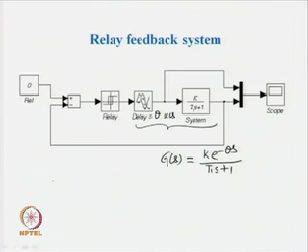found that the output of the system is governed by two expressions, namely y(t) = kh(1 - e^(-t/T1)) for the time range 0 ≤ t ≤ θ, and y(t) = kh(2e^(-(t-θ)/T1) - e^(-t/T1) - 1) for the time range θ to Pu/2.

So, these two equations y(t) can be plotted, and in that case the output will take the shape of this form, where this is the time Pu/2, the peak occurs at time t equal to θ, and the plot begins with time t equal to 0.

Then we have also derived analytical expressions which are explicitly meant for stable first order plus dead time systems, and those analytical expressions are of these forms. So, the condition for sustained oscillatory output is given by the expression 2e^(-(Pu/2 - θ)/T1) - e^(-Pu/(2T1)) - 1 = 0.

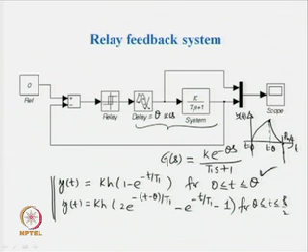It is not an assumption; as far as first order plus dead time systems and their relay tests are concerned, the peak occurs at time t equal to θ, because the analytical expressions have given that we can have a plot for y(t) up to time t equal to θ, after which the values go on decreasing, because the input to the system changes from positive h to minus h. Because of the change in input, the output slides down and comes down to 0 at time t equal to Pu/2.

Now, these two expressions can be used further for identifying a simple transfer function model. What do we mean by simple transfer function model? Let us consider initially the identification of an integrator with delay. So, the identification of a system given by the transfer function G(s) = k̄ e^(-θs) / s.

So, when the system is of this form, what sort of output is expected from the system? Under relay test, we know that for such a system the output will be triangular pulses only. We will concentrate on only the positive half of the output for developing analytical expressions. So, let this be y(t) for time t from 0 to Pu/2.

Where the peak occurs I do not know, but we shall make use of these expressions to find explicit expressions for the parameters of this transfer function model. How many parameters are there in this transfer function model? We have got two unknowns in this transfer function model.

Now, let me make use of these expressions. So, we have got the first expression as 2 e^(-(Pu/2 - theta)/T1) - e^(-Pu/(2T1)) - 1 = 0. So, when T1 tends to infinity, what do we get? The exponential term e^(-(Pu/2 - theta)/T1) can be written in the form of 1 - (Pu/2 - theta)/T1.

Why is that so? Because when T1 tends to infinity, the exponent will be a small number, and e^x, when x is a small number, becomes 1 + x, and e^(-x) becomes 1 - x when x tends to 0. So, when T1 tends to infinity, the whole exponent will be small, enabling us to write the exponential term as 1 - (Pu/2 - theta)/T1. Similarly, e^(-Pu/(2T1)) when T1 is very large can be written as 1 - Pu/(2T1).

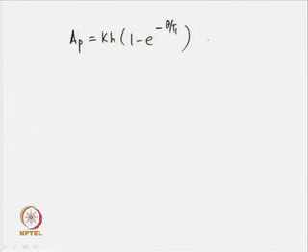This is one explicit expression we have been able to obtain using the analysis and using the measurement Pu, or Pu by 2, half period of the oscillation. Let us use the second expression. Now, we also know that the peak amplitude of the output signal Ap is obtained with the expression Ap is equal to kh(1 minus e to the power minus theta upon T1). This is what we get for the first order plus dead time stable system.

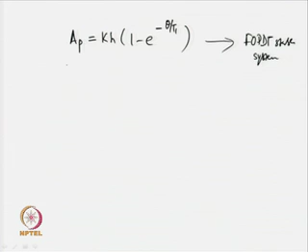Now, when the limiting value is put here also, when T1 tends to infinity, then Ap will be equal to kh(1 minus e to the power minus 0). No, we cannot put that, sorry, again I have to make use of the condition that when T1 tends to infinity, the term e to the power minus theta upon T1 will be given by 1 minus theta upon T1, the way we obtained earlier using the condition that e to the power x is equal to 1 plus x and e to the power minus x is equal to 1 minus x when x tends to 0.

So, when T1 tends to infinity, e to the power minus theta upon T1 is 1 minus theta upon T1, thereby giving us Ap is equal to kh times (1 minus (1 minus theta by T1)), which is ultimately kh times theta by T1. Again, we know that k by T1 is k bar. So, this gives us k bar h theta, since k by T1 is finite and given by k bar. Thus this enables us to write an expression of the form k bar is equal to Ap by h theta. So, this is equation number 2 for us.

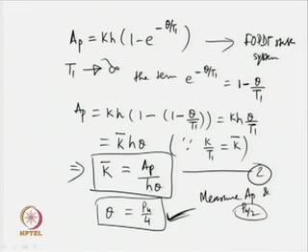After estimating theta, use equation 2, which is k bar is equal to Ap by h theta. h is known, a user-defined or user-set value. Now, theta is estimated and Ap is measured, which enables us to estimate the unknown k bar. So, let me summarize these two things.

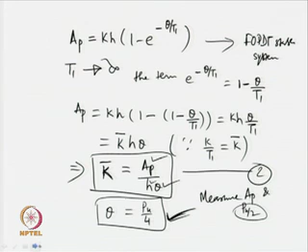Using these two expressions, conditions for sustained oscillatory output obtained for a first order plus dead time stable system, it is possible to find the expressions theta is equal to Pu by 4 and k bar is equal to Ap by h theta, which can be used to estimate the unknown parameters k bar and theta of our transfer function model G(s) is equal to k bar e to the power minus theta s upon s. So, if we have an integral system with dead time, then it is possible to measure Ap and Pu, or Ap and Pu by 2, make use of these explicit expressions and estimate the unknowns of this transfer function model.

Then the question may come, how can we apply this technique for estimating the transfer function model? We have to observe the output signal. The output signal from the relay test must be of triangular form, only then are we allowed to use these two expressions to find the transfer function model for the dynamics of the system. So, if the actual system is expected to have dynamics of this form, the measurements can be translated into the transfer function model parameters using these two expressions. Again, we shall extend this concept for identifying some other type of simple transfer function model that we have considered in our earlier lecture.

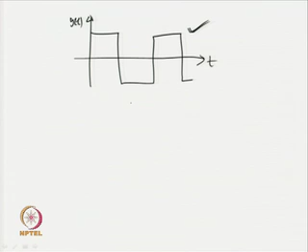Let the relay test result in output of the form shown over here. So, when the output of a relay test is of this form, then what sort of transfer function do we have to find for the dynamics of that system? The transfer function can be of the form G(s) = k e^(-θs). This we know, because when a relay test is conducted on a system having this dynamics, rectangular or square pulses are obtained as the output of the system.

Now, from here what is the half period again? Then Pu/2 is this much, and what is Ap? Ap is the output we obtain here. So, this is Ap and this is Pu/2. This is how we can make measurements on the output of the relay test, and the output will give us parameters like Ap and Pu/2.

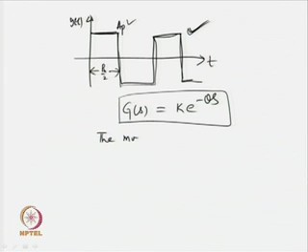So, assuming that the relay test is inducing output of this form, we shall go for identification of the dynamics of the system in the form G(s) = k e^(-θs). The model has got two unknowns, k and θ. Therefore, we need to find two expressions for k and θ in terms of the measurements Ap, Pu/2 and h, the relay output or the input to the system.

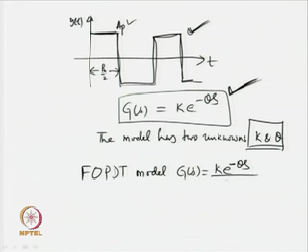Then how can we obtain such a model? We can obtain such a transfer function model from the general first order plus dead time model given by G(s) = k e^(-θs)/(T1 s + 1). Why do I target this particular first order plus dead time model? Because we have derived analytical expressions for it, and those expressions can be used to obtain analytical expressions for simpler models of this form, provided it is possible to get this model from the general one. So, how can we obtain it?

When T1 tends to 0, the first order plus dead time transfer function model will be G(s) = k e^(-θs). Then this limiting value can be put in the expressions obtained for the first order plus dead time model, and that will enable us to derive simpler, explicit expressions to find the unknowns of G(s) = k e^(-θs). So, we shall make use of those expressions now with the limiting condition that T1 tends to 0. One has to be very careful when applying limiting conditions to analytical expressions. You must follow some logic.

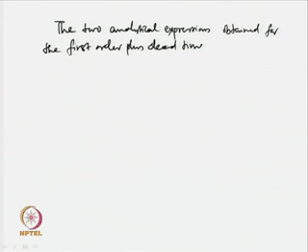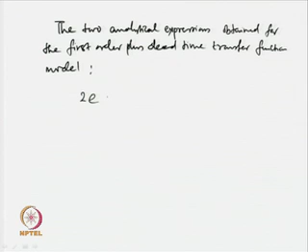So, it has been illustrated how powerful the two expressions are. The two analytical expressions we have obtained for the first order plus dead time transfer function model are 2 e to the power minus (pu by 2 minus theta) by T1 minus e to the power minus pu by 2 T1 minus 1 is equal to 0, and Ap equal to k h (1 minus e to the power minus theta by T1).

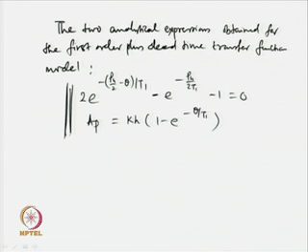These two can easily be extended for finding transfer function models of the form G(s) is equal to k e to the power minus theta s, or of the form G(s) is equal to k bar e to the power minus theta s upon s, with the limiting values of, in this case, T1 tends to 0, and in this case T1 tends to infinity, and k bar, equal to k upon T1, is finite.

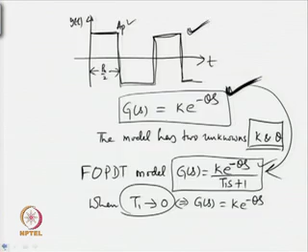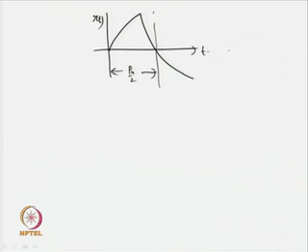So, basically by mentioning that, what I wish to point out is that these two expressions are quite powerful as far as analysis of first order plus dead time systems is concerned. So, first order plus dead time systems result in output of some specified form. The output we get is of this form. So, let us concentrate on the half period. This is the half period Pu by 2, this is my y(t) and this is t. So, this is what you get from a first order plus dead time system.

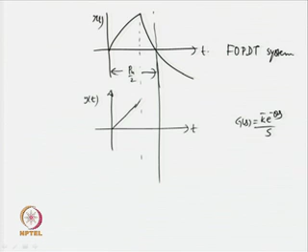Now, when we have got a simpler system whose dynamics is given by the transfer function G(s) = K bar e to the power minus theta s upon s, then the corresponding output becomes triangular in fashion, and when the system has got dynamics K e to the power minus theta s, the corresponding output from the system assumes a pulse of this form. So, looking at the shape of the output signal, we can decide about the type of transfer function model we should choose for obtaining the dynamics of the real time system.

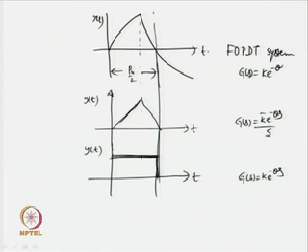So, in this case it is K e to the power minus theta s upon T1 s plus 1. So, assuming that we have got a stable first order plus dead time system, an output of this form is expected. Then, when we have got a simpler system which has got an integrator with delay, the output will be having this shape. When we have got a system with a gain and a delay only, then the output will be of this form. So, the point of mentioning all these things is that we can easily measure the peak amplitude Ap in all cases, and we can easily measure the half periods Pu by 2, employing zero crossing detectors and peak detectors.

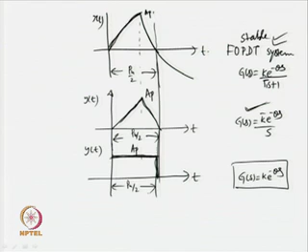To find the peak amplitudes, employ peak detectors, and for finding the half periods you employ a zero crossing detector. Measure Ap and Pu by 2, and use the analytical expressions we have found. So, for the stable first order plus dead time system, what are the analytical expressions? The first two. Use the first two analytical expressions and solve the two expressions simultaneously to obtain the unknowns associated with the transfer function model.

Whereas, when the output of the system is of this rectangular form, then use the expressions K = Ap by h and theta = Pu by 2. But in this case we have got K bar: K bar = Ap by h theta and theta = Pu by 4. So, the whole point of discussion about these wave shapes is: look at the shape of the output signal, then go for a particular type of transfer function model for describing the dynamics of the real time system.

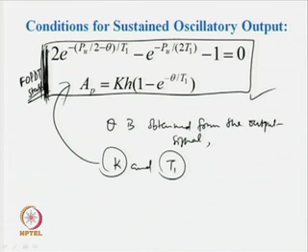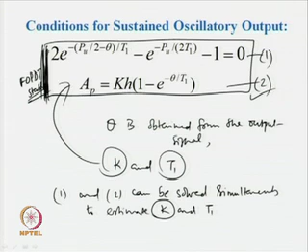So, equations 1 and 2 can be solved simultaneously to estimate k and t1. In that case, k need not be known a priori; k can be estimated as well, k can be obtained using the analytical expressions.

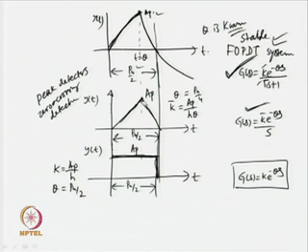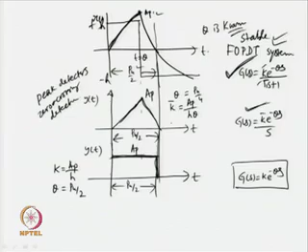Now, there is one more technique to find the time delay theta associated with the transfer function models. One can take the first order derivative of the output signal. In that case, there will be a sharp change in the first order derivative of the output signal at time t equal to theta. Why does that happen? We know that the input to the system is changing at time t equal to theta. The input becomes minus h at time t equal to theta, but prior to that the input remains positive h. So, that concept can be made use of to find the time delay associated with transfer function models.

So, what I mean by that: given a first order plus dead time system, when a relay test is conducted, it is expected to obtain the output y(t) in this form. Now, if I wish to find y dot t, what will happen? There will be sharp changes in y dot t at time t equal to theta. Why is that so? Because the output signal we have is not continuous.

As far as the half period Pu by 2 is concerned, we have got the outputs from different inputs; the inputs are changing. Therefore, we have two segments, or indirectly speaking, I cannot have the plot for the whole half period using one analytical expression. So, I have two expressions. For this part of the output signal, I use y(t) equal to something for time 0 to theta. Similarly, for the other part of the output, I use another expression for y(t) for the time range from t equal to theta to t equal to Pu by 2.

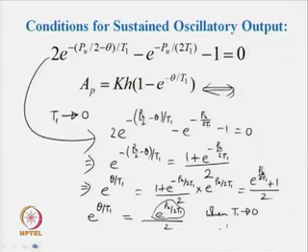I will summarize now. So, what we have studied in our lecture: identification for simple systems is discussed. We have obtained analytical expressions, rather I would say explicit expressions, for the parameters of simple transfer function models like a transfer function with an integrator and delay, and other simple transfer functions like a gain with a delay. So, we have been able to derive explicit expressions for the unknowns of those simple transfer functions in terms of measurements made on the output waveform.

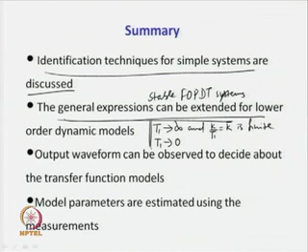Now, the general expressions found for the stable first order plus dead time systems have been extended for lower order dynamic models. How has that been possible? With the limiting condition that T1 tends to infinity such that k upon T1 is equal to k bar is finite, and the other limiting condition T1 tends to 0. Using these two limiting conditions in the general expressions, we have been able to find simpler explicit expressions for the transfer function models of simpler systems.

Now, the output waveform can be observed to decide about the transfer function models. When the output of the relay test is of this exponential shape, we go for a transfer function model of the form G(s) = k e^(-θs) / (T1 s + 1). When the relay test is yielding triangular pulses only, the transfer function model can be of the form k bar e^(-θs) / s, whereas when the output is either rectangular or square pulses only, the transfer function model can be of the form G(s) = k e^(-θs).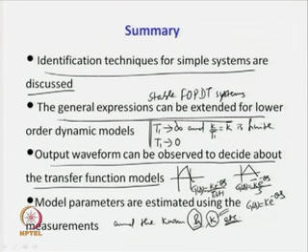Now, the model parameters are estimated using the measurements and the knowns h and k, etc. Why are these known? Because these are user defined; users set the relay parameters. And in the first order plus dead time transfer function model case, if a priori information about the steady state gain is there, then that information also can be used in the explicit or analytical expressions to find the unknowns of transfer function models.

Now, some points to ponder: how to decide the form of transfer function models of systems to be identified. As I have already mentioned, when the output of the relay test is of this form, go for the transfer function model G(s) = k e^(-θs) / (T1 s + 1), and assume that one unknown of this model is known a priori, then estimate the remaining two unknowns using the analytical expressions. When the shape of the waveform is triangular, go for the transfer function model of the form k bar e^(-θs) / s.

When the output y(t) is rectangular, go for the transfer function model G(s) = k e^(-θs). Now, what happens when the output is not of these forms? In that case, we may have to consider a higher order transfer function model, which we shall discuss in subsequent lectures. Can the analysis be extended to transfer function models having no delays? As you see, a time delay is there in all these models. Is it possible to identify transfer function models without time delay?

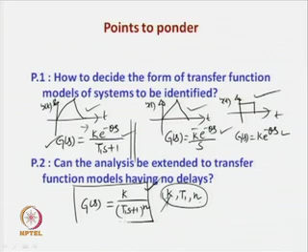Yes, it is possible. We can have a transfer function model of the form G(s) = k / (T1 s + 1)^n. These typical transfer function models are often used for identifying real time system dynamics. This also involves three unknowns: k, T1 and n, which can be obtained using the analytical expressions. Again, we have to have prior information about one of the unknowns, and use the analytical expressions to find the remaining two unknowns T1 and n, or the set k, T1 assuming n is known, and so on. So we have got transfer function models of a different form without time delays.